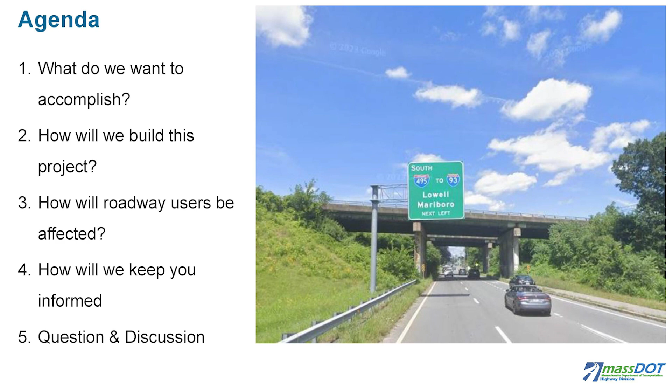Our agenda for this presentation is as follows: What do we want to accomplish? How will we build this project? How will roadway users be affected? How will we keep you informed? And then at the end, we'll have plenty of time for Q&A.

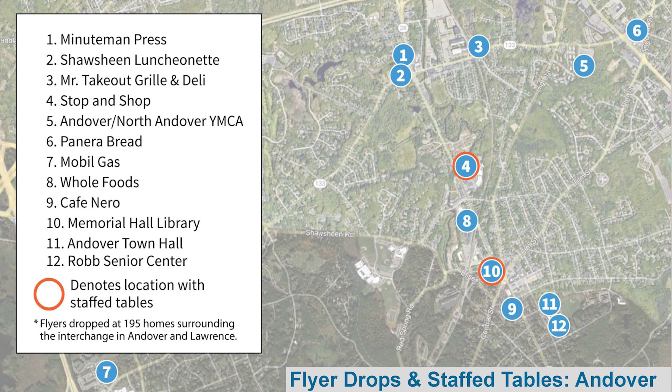One thing worth noting, because it cuts between the two communities, if you look right here, this is where the interchange and the bridges over Route 28 would be. We specifically picked 195 homes that really have what I'd call ringside seating. Those folks got a flyer dropped directly at their door, and that would have been last Monday.

When we drop these flyers, we look for someplace that is neutral. We try not to have it somewhere that's kind of somebody's space. You don't tend to put it in a church, because not everybody goes to that church, or in a hospital, because some people feel afraid of doctors. So you try to put it somewhere lots of people go. Everybody goes to the grocery store, lots of people go to the library, and sometimes people have to go to the registry.

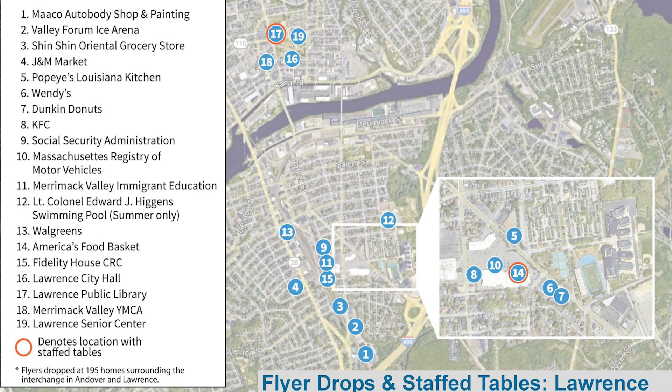We also want to thank everybody who shared our flyers: the state delegation for both communities, the Registry of Motor Vehicles, the city governments going all the way up into Methuen, the various select boards, school departments, the disability, elderly, and veteran services departments, area healthcare providers, social service organizations, and the Merrimack Valley Chamber of Commerce. Everybody's been really nice to us. I know the area Metropolitan Planning Organization, or MPO if you're in the know, has helped push this as well, so just a thank you to everybody who did that.

At this point, I'll hand it back over to Joe, who's going to talk you through some more of the project.

We know these are very busy roadways and they have many impacts on everyone. All the work we're doing is with the goal of having as little impact as possible. I-495 carries 57,000 vehicles per day in each direction, and Route 28 carries 14,700 vehicles per day in each direction, and also has access to homes, businesses, educational opportunities, and medical care.

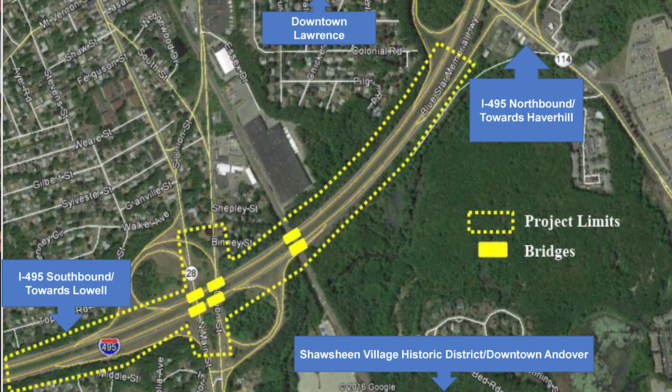So now I'll go over what we want to accomplish with this project.

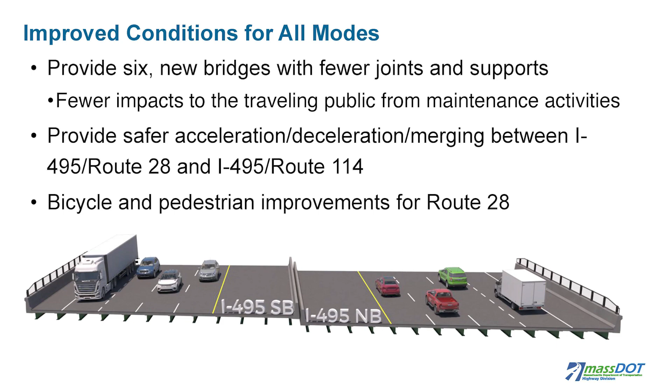Last note here, this project also gives us an opportunity to make bicycle and pedestrian improvements down below the bridges within the limits of work on Route 28.

So now getting into our planned construction approach, this project is a little bit unique. We are going with design build procurement, and the typical method of procurement that we use on a job is design bid build. So MassDOT would develop a set of plans and put it out for bid, and then contractors would bid on that set of plans, and the lowest bidder wins, and they would build that project exactly how it's shown on the plans.

With this project, we're going with design build. So MassDOT puts together a sketch set of plans, or a BTC, which stands for base technical concept. And the reason we do that is because we then put that base technical concept out for bid to teams of contractors and engineers that work together to finish the design and then construct the project. That allows coordination, flexibility, and innovation between the design build team. So that's the Middlesex WSP team that we have here today. They provide MassDOT with a price to finish the design and also construct the project.

So the winner of that bid is based on best value, not just lowest cost. So we also looked at their technical proposal, what innovations they have to improve the timeline, lessen the impacts to the public, and just make for a better project overall. So it gives them the flexibility to come up with their own innovations instead of us just telling them exactly what to do.

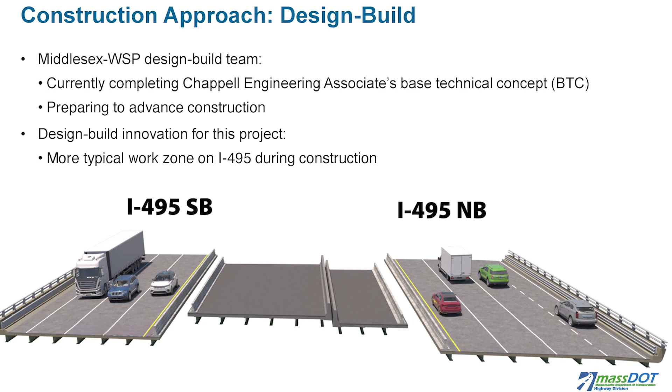One thing I do want to highlight here is that the original design, some people may have seen it when that was released a few years ago, had a split barrel traffic pattern. So what that means is on your 3-lane highway, you would have 1 lane of travel, split with barrier protecting our work zone as well as the public, and then 2 more lanes. Obviously, you can picture that in your head. There comes a lot of challenges with that.

My career, I've done that a few times, and the biggest thing is that if someone gets into an accident in that single lane, it takes a lot of time to get them out. You end up building up congestion, and it's just not good for everyone who takes this on their daily commute.

So what our team has done is we've created a traffic pattern, so at all times during peak hour, all of your rush hour, you'll always have 3 lanes. Now I'm going to start clicking through and I'll walk everyone through what it will look like over the next few years.

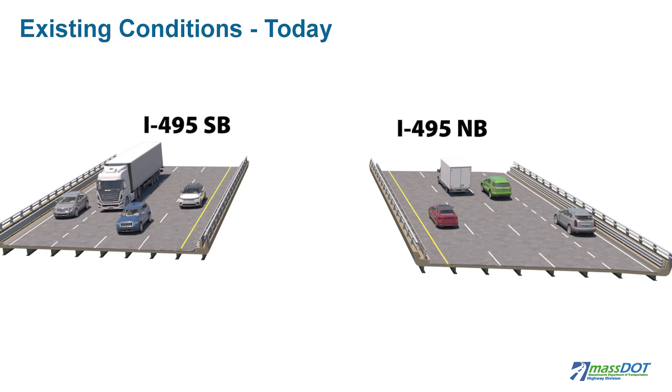So the conditions up on the board right now, that's what everyone sees and drives today. It's 3 lanes on either side, northbound and southbound. This year, in June, we'll start into our construction season, which is our stage 1, which is the summer of this year to fall of next year. All of our work is taking place in the median there. So again, during peak hours, we are not affecting the flow of traffic. We do make work for ourselves in the median by scooching traffic over a little bit towards the shoulder, but again, all the lane widths and travel lanes will remain very similar to what everyone sees today.

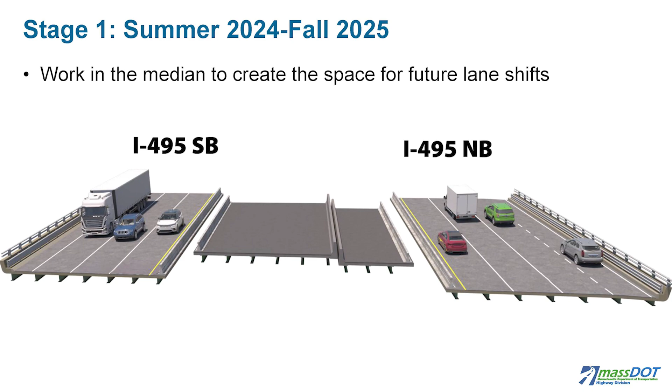In the fall of 25, the northbound traffic gets moved to the center median. From there, our team then moves over to the northbound lanes, which will all be closed, divided by traffic barrier, where we will then demolish and rebuild the northbound.

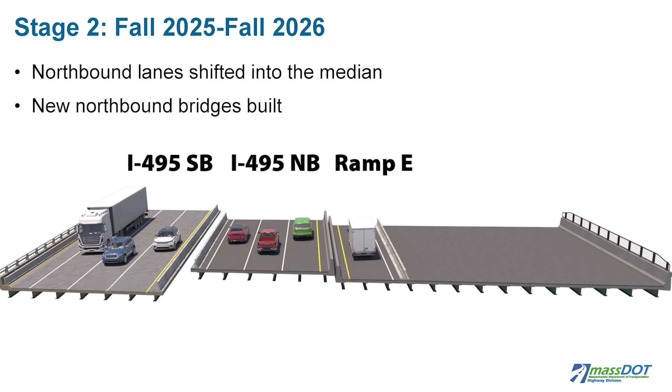Very similar into 26, we just flip everything. So the northbound now goes to the new permanent bridge, southbound gets moved to the median. We take our work zone in the southbound lanes, demolish and rebuild the new bridge and roadway.

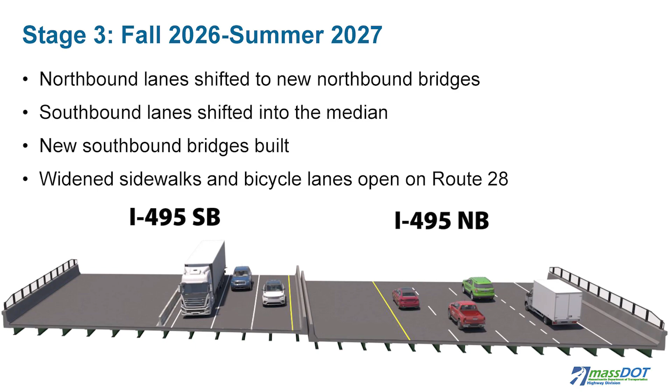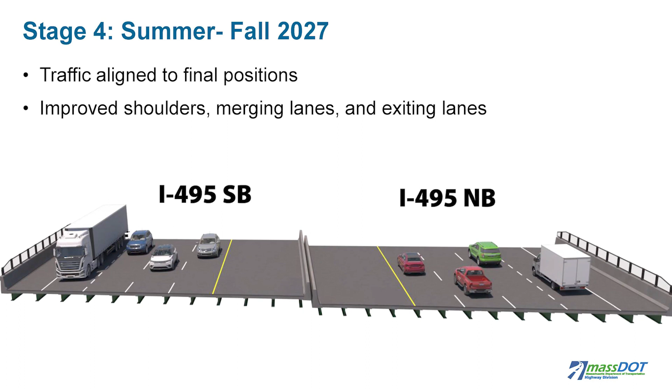And then at the end of our project here, the summer of '27 into fall, that's when we're essentially putting everyone on the new permanent bridges and permanent roadway. And with that, I'm going to turn this over to Eric.

So there will be some unavoidable traffic impacts on both 495 and Route 28 during construction. However, lane reductions and detours will occur outside of the peak commuter hours. All 3 lanes on 495 will remain open, as Mike said, but there will be some closures on Route 28, one direction at a time.

I'm going to walk you through the various detours associated with the project one by one. As I do, just keep in mind that these detours are short-term and implemented at night only. They won't be in place day after day, impacting rush hour.

All detours shown will be used in each of the stages Mike just went through, and the reason for them is to allow us to work safely over Route 28 or to adjust one of the ramps between 28 and 495. Our goal is to design detours that keep drivers on larger roads and off of smaller residential streets.

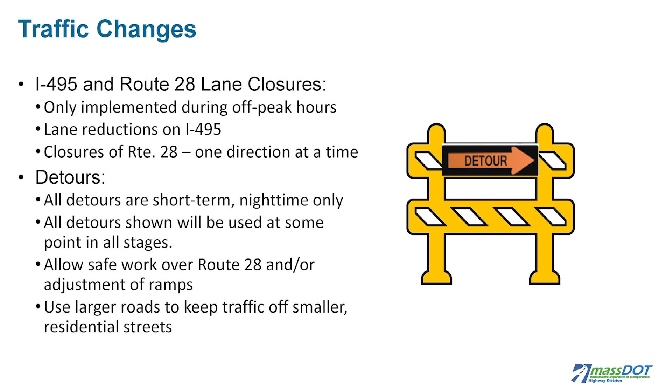We have also looked for intersections with dedicated left turn lanes and traffic signals so traffic doesn't back up. Where we can, we have tried to provide 2 detours to get to the same place, so if you miss your first chance, you're not out of luck to find your way back. Don't feel you have to memorize these.

Part of our public outreach later in the job will be putting these detours out on email and the project website prior to one being implemented so everyone knows what to expect. In addition, signage will be in place to direct you along the detour routes.

As we walk through these detours, you'll hear me refer to things like Ramp A or Ramp B. Unlike streets in your town, ramps don't have easy names, and I-495 northbound to Route 28 northbound gets to be a mouthful after a while, so we assign a letter to each ramp for easy reference. Again, no need to memorize these, you'll get to see them again before they are implemented.

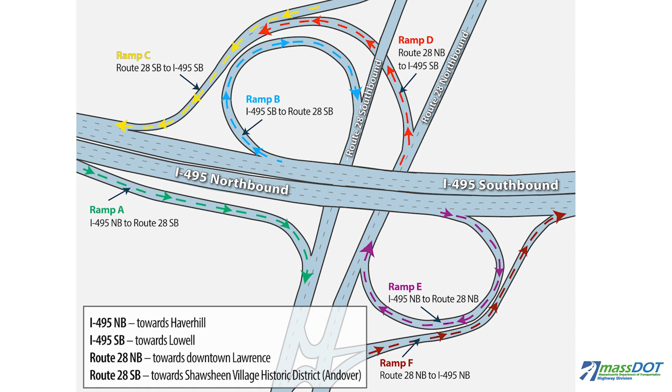Ramp A is 495 northbound to Route 28 southbound. Ramp B is 495 southbound to Route 28 southbound. Ramp C is Route 28 southbound to 495 southbound. Ramp D is 28 northbound to 495 southbound. Ramp E is 495 northbound to Route 28 northbound. And lastly, Ramp F is for Route 28 northbound to 495 northbound.

For the closure of Route 28 south at I-495 off-ramp B, this detour will be used when demolition of the bridges over Route 28 southbound or setting beams for their replacements takes place. If traffic is coming towards 495 from downtown Lawrence, the signed detour would be left from Route 28 southbound onto Andover Street, right onto Route 114, under 495, right onto High Street, right onto Haverhill Street, and then

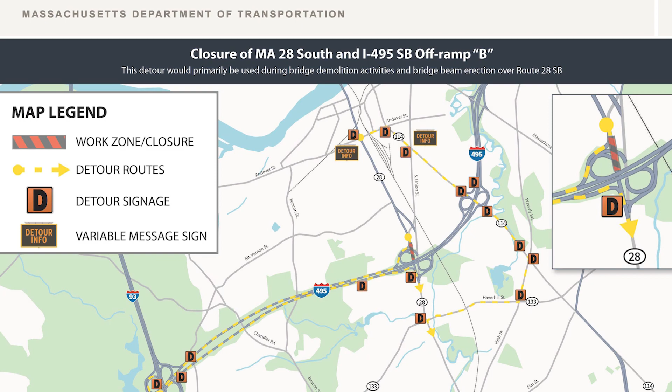a left back onto Route 28 southbound. For traffic that is already south of Andover Street or heading south to the 495 main line, those vehicles would get to stay on the interstate at or through the Route 28 interchange. They would then travel south, one interchange to I-93, use the ramps then to reverse direction, and come back to the Route 495/28 interchange, exiting to 28 southbound, heading for Andover.

For the closure of 28 North at I-495 off-ramps D and E, this detour would be used during demolition of the bridges over Route 28 northbound or when setting beams for their replacements. For traffic coming north from Andover, the movement is a reverse of what we stepped through for the Route 28 southbound closure: Haverhill Street to Route 114, under 495 to Andover Street, and then back to Route 28.

For traffic that has either missed the first detour or originates between Andover Street and 495 and wants to head into Lawrence, we would route those drivers one exit north onto 495 to the Route 114 interchange, where they could pick up the local detour to Andover Street and back to 28.

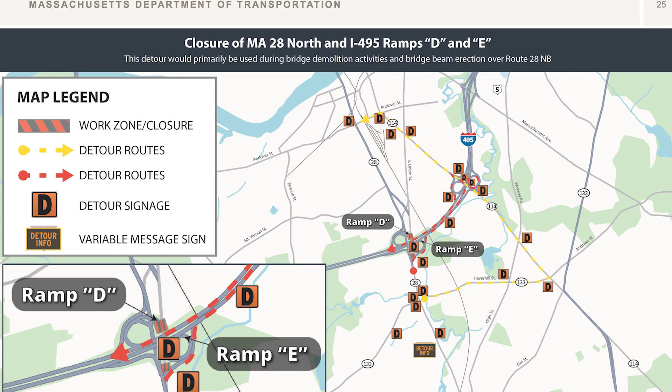Traffic from Andover seeking to access 495 southbound likewise has two options. One is to take the local detour using Haverhill Street and Route 114 to the interstate. The other is to continue north past Andover Street, get on 495 northbound, and then use the 114 interchange to reverse direction and head south.

Closure of 495 on ramps C and D. This one is tricky because ramps C and D merge into a single ramp before they funnel into 495 southbound. Ramp C collects traffic from Route 28 headed towards Andover, and Ramp D collects traffic from Route 28 heading towards Lawrence. For traffic coming from Lawrence that would normally use Ramp C, we would detour them along Andover Street to 114 to the interchange with 495, where they could go south along the interstate.

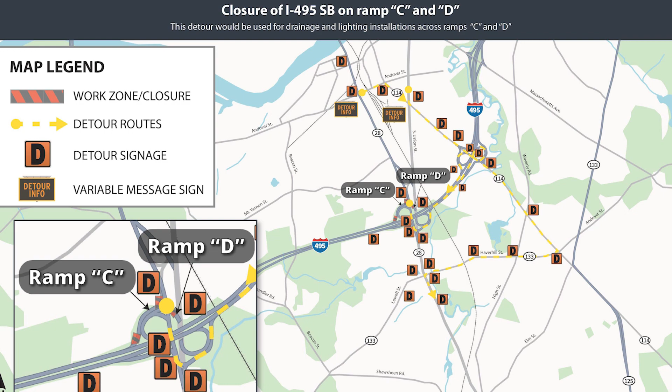For traffic coming from Andover that would normally use Ramp D, we would pick them up at Haverhill Street, send them to Route 114, and from there to the 495 interchange, where they could go south. For any traffic originating between Haverhill Street and 495, or traffic from Andover that missed the first option, they could get onto 495 going north, go up to the 114 interchange, and reverse direction.

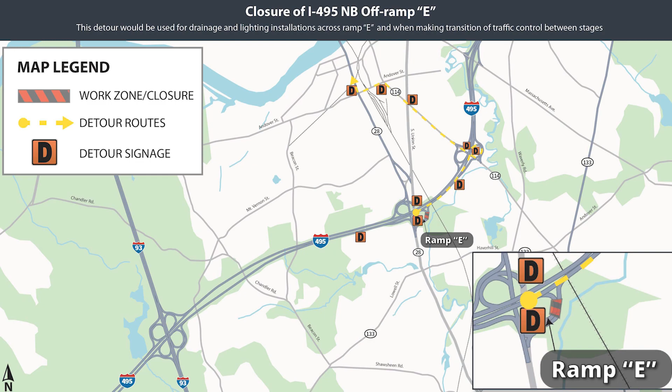Closure of 495 northbound off-ramp E. Ramp E takes northbound traffic from 495 to Route 28 heading towards Lawrence. When that is closed for work, again you may be detecting something of a theme here, we would send drivers to the 114 interchange and then have them get off on 114 northbound to Andover Street and back there to their desired line along Route 28.

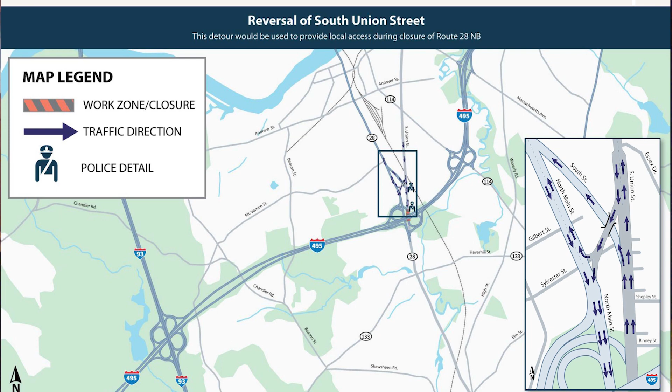For the reversal of South Union Street. This next detour is a little tricky, so we're going to take this one slow. This image shows our larger map where the section of Route 28 immediately north of 495 is highlighted by the blue box. There are some unique challenges associated with this area when we have work taking place on Route 28 northbound. I'll go over those now.

As I'm sure you are aware, Route 28 splits a little bit before it passes under 495. As you're going under the bridge, northbound traffic is on South Union Street and southbound traffic is on North Main Street. South Union Street traffic can either go straight and continue onto Union Street or veer left onto South Street, crossing below a bridge that carries southbound traffic from South Union Street to Route 28 going towards Andover. There are homes along Shepley and Binney Streets, as well as businesses like Stewart Electrical Contracting and Mako Auto Body, which can only be accessed by traveling north on South Union Street.

That's not that big a deal under normal conditions because just south of 495, there's a U-turn which allows traffic to reverse direction to reach those destinations. That's how things work today. When we have to close Route 28 under 495, there's not really a good way for residents on Shepley or Binney Street to get back to their homes after they've left. They can go north, but there's no good way to get back.

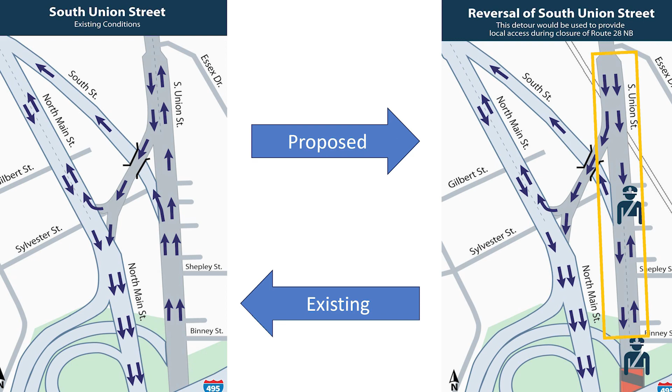I'll now turn this back over to Mike.

All right, so obviously we know we're going to be here for 4 years. There are residents that live pretty close, about 400 feet away. Something that's very important to us and the project is making sure that we're good neighbors. Our project requirements mean we have to create a bunch of different plans to ensure that we meet our obligations to being good neighbors.

The first plan we have to do is a real-time traffic monitoring plan. I'm sure many of you have seen driving up and down the highway the big VMS boards and sensors telling people how fast it's going and how long it's going to take from point A to point B. We'll be implementing that on this project. That's a big effort to make sure that if people see the minor inconvenience of traffic, they know exactly how long it is going to take to go through our mile-long project. That typically keeps people on the main road and off of the back roads, and also gives us a better way to manage traffic on a day-to-day nature.

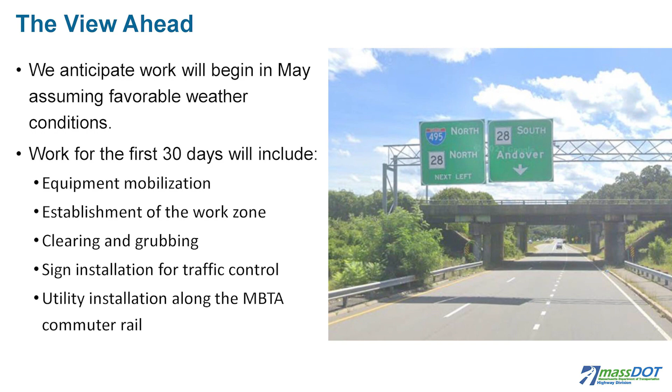But the bulk of our work will be down along the MBTA right-of-way commuter rail. We're not disrupting train service, so if you do take the train, you're going to be good to go. We'll be installing a duct bank for National Grid.

I mentioned this quickly before, but I do want to run through it again. So just in broad terms, the project is roughly 4 years. We're starting in the spring, summer of 2024, working to 2025. We'll then enter stage 2. Stage 2, as I mentioned, is taking the northbound lanes, shifting them into the median, where we build the new northbound bridges. That stage is approximately a year.

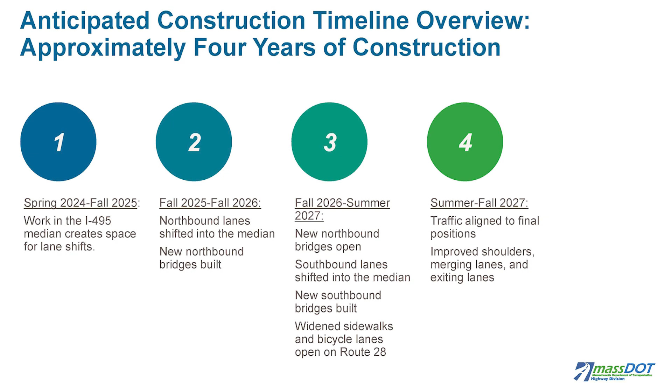The following year, into '26, we move northbound back to their new home on the new northbound bridges, shift the southbound lanes into the center median, and demo and rebuild the southbound bridges. Then into summer, fall of '27, traffic will be aligned into its final position, and we'll be working on demobbing, final cleanup, and getting out from under everyone's hair for a little bit.

So with that, I'm going to turn it back over to Nate to talk about how he will keep everyone informed. We will. Thank you very much, Mike.

Those usually come out every Friday or every Thursday, whichever day we pick. We try to pick something close to the end of the week, and you'll know why in a minute. The goal is to really try and keep people informed, given the impact and how tight the community is on the project, with those homes in some cases under 400 feet away.

So these will be coming out every week, and what it will say is what did we work on this week, what have we gotten done on crucial things, and then what can you expect in the upcoming week ahead.

You can always email us with questions and concerns. That email account is live at this time, and we've already answered some questions and had some nice conversations through the account. That comes to me, to our legislative liaison Dan Fielding, and also to Joe. We do get back to folks, typically within a day or two. Could be a little longer if it's a complicated question, because I get the email, make the ring around with everybody who's involved, massage it all together, then it goes back to Joe, he checks it for accuracy, makes sure it's ready for public consumption, that you didn't blur the meaning on anything or get anything wrong, and then the response goes out.

Hi, my name is Mark LaPlante, city councilor representing the bulk of where this is going in Lawrence. A couple of technical things: one, there is no North Main Street in Lawrence, we call it South Broadway, so if you're making any maps, I'd hope they show South Broadway as opposed to North Main Street, there isn't one of those. You mentioned peak driving times a couple of times, what is peak driving times? That's the question.

The other thing is, in your studies you've been doing, I'm sure you have, what kind of impacts have you detected that you could give us a heads up on, that you anticipate? Looking at the different places where the detours are, obviously there's going to be confusion, and there's a tremendous ride around for some of these, and I'm presuming there's no other way you can do it, but with those tremendously long detours there are going to be impacts. My question would be, what are your anticipated impacts, especially on the Lawrence side and the Andover side for obvious reasons? So what would be the impacts on the Lawrence side? I think that's my starters.

I will wear the goat for the incorrect road name. I will also desperately try to pass it on to Google, although I doubt they will do anything with it, but we will correct those maps. I think your other questions are probably best handled by Eric, so I'll pass that over to him.